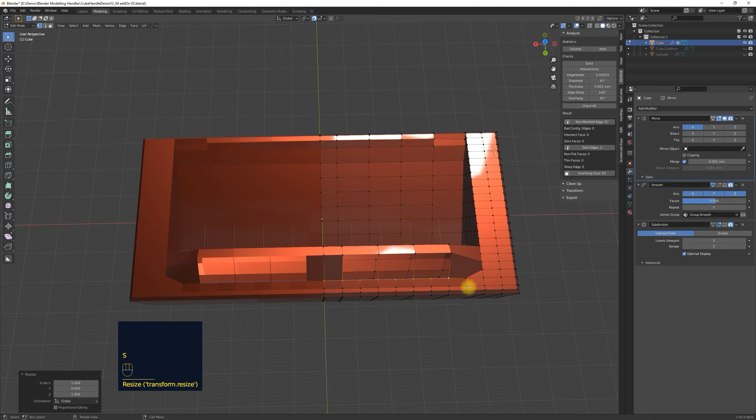And you can use the dissolve function to delete any unnecessary geometry in your model without affecting the overall shape of your model. I designed two different models, one with a rabbet and an outstanding rounded handle, and one flat model with a rabbet. But let's stay with the first version for now. The model does not have to be printed as one solid block. I create additional cavities to reduce the printing time. After that, I export the model to STL format to test the slicing in the Cura slicer program.

Here are the typical file export settings to create an STL file. The STL file contains all the surface or hull information of your 3D object that is necessary for the slicer program.

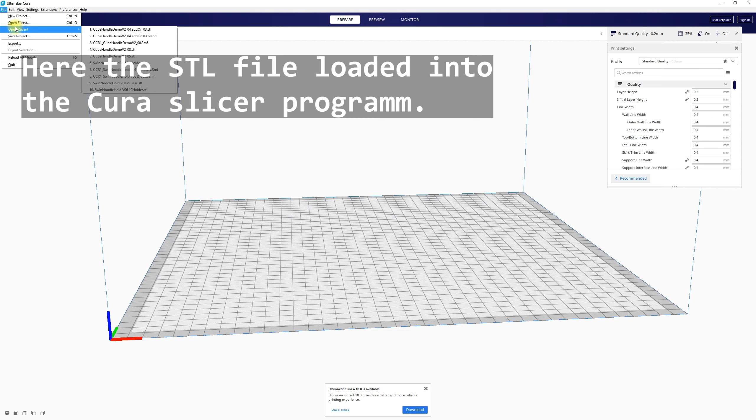Now I can check the individual print layers and the print model for errors. I slice the model and switch to the preview view of Cura. So from what I see, the print looks good. I see no unnecessary support structure, I see no holes, so therefore I say it's fine.

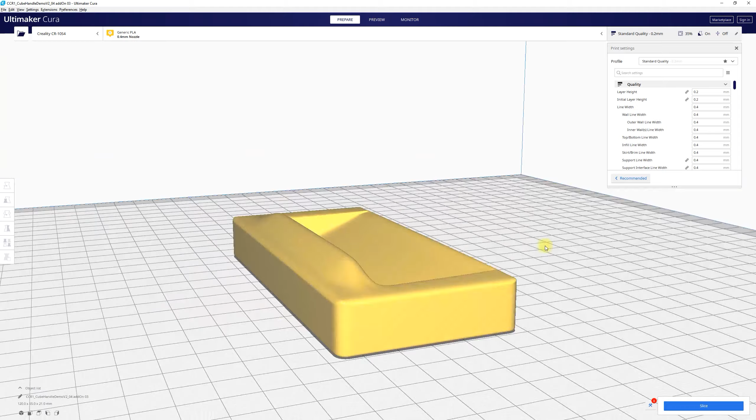And looking at print time using the default settings, it will take roundabout 7 hours. Maybe we can improve this later on and decrease the print time a little bit.

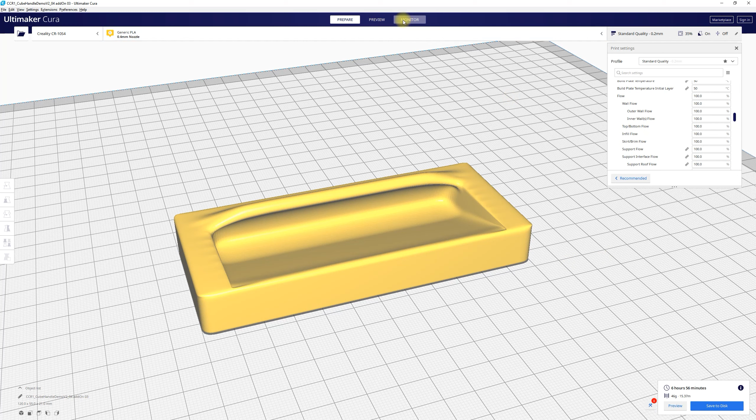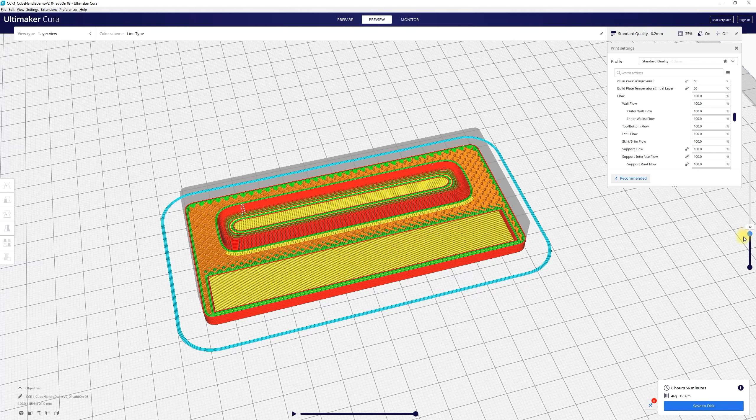I will show my settings in the Cura slicer for my PLA Plus material and my Creality printer later in the video. You can slow down the video or stop the video to see the individual settings. The basic guidelines for me are, for this example, 0.2mm layer height, 1 to 2mm wall thickness, 215 degrees nozzle temperature, 50 degrees bed temperature, and 35% infill.

In addition, I created another model with a stepped top edge. This can be used to hide inaccuracies during the milling process. Here you have to take care to get sharp corners, especially in the inner corner edges.

For this purpose, I add additional cuts with the loop cut tool, or I use the knife to get sharp edges. Edges can then be moved into the corners with the key combination GG. This function can be used to slide edges along other edges.

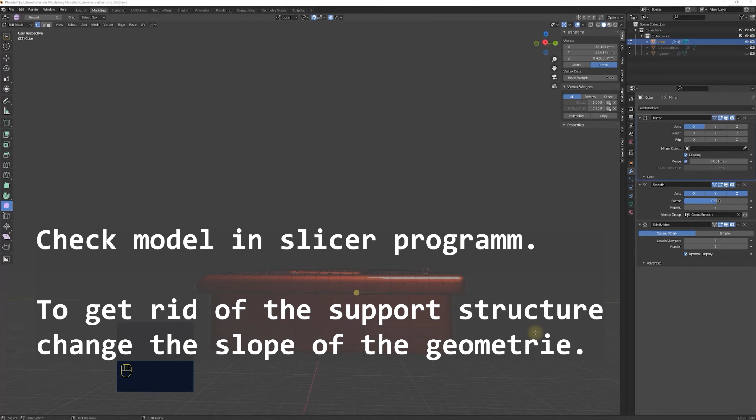Some fine detail work was also necessary in this model. I found holes that I deleted using the merge function, and I also added additional vertices or faces where it was needed. The steps that I processed here are very similar to the ones that I already processed in the previous model. Therefore, I do not explain this in detail. Just have a look in the explanation of the previous model. Also here I corrected the slope of the pocket geometry to get rid of any support in the pocket.

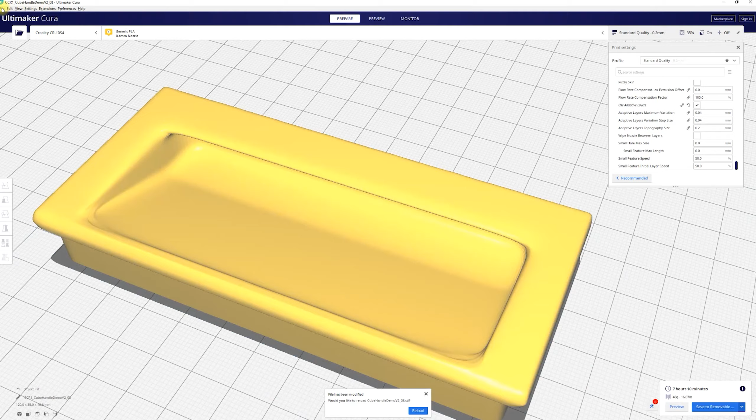The models are printed on my Creality printer CR10S4 using the FDM 3D printing method. The layer height was about 0.2 mm. Looking at the final 3D printed object, it still looks a little bit rough, but with some sanding, priming and painting, you can create very nice results.

More about this in the upcoming videos, but I can show you a very similar example that I produced around Christmas time. I will add a link here in the video.

If you are working with a model without a rabbet, then you have to work very precisely and pay attention to the radius of the cutter, which must match the radius of the corner edges of the model. Otherwise you will get ugly holes at the corners. Therefore I think the version of the handle with a rabbet is better.

For demonstration purposes I used the router to cut a handle into an acacia board. I used a small Makita router with a 12 mm groove cutter and an 8 mm shaft. I did not use a router fence during the milling and guided the router freely in my hands.